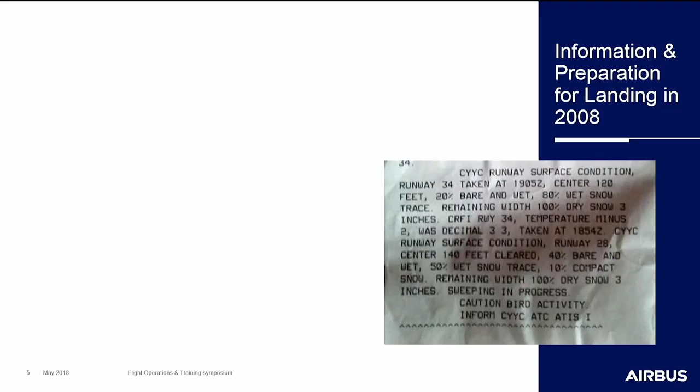And this report gives a lot of information. So in this case, we only have a part of the runway that is cleared. It is 40% bare and wet. It is 50% wet snow trace, and it's 10% compact snow. And we have the edges that are covered with dry snow.

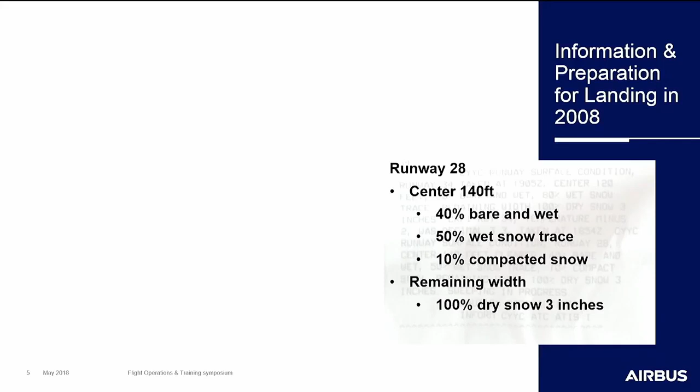A lot of information for our 2008 flight crew that's trying to now enter this type of table to do their computation. And this was obviously not an easy call. It was not easy to make a relevant assessment.

And on top of that, the distances that we published were not as operational as they are today. That is why we implemented on top of that, even though we had a principle of reporting what the inspector would see, initiatives trying to give information that was directly relevant to performance.

And because we're in Canada, I have to talk about the Canadian Runway Friction Index, the CRFI. CRFI is an interpretation of a measurement made on the runway that results in a number, and this number is intended to be used directly in the determination of performance, at least for landing.

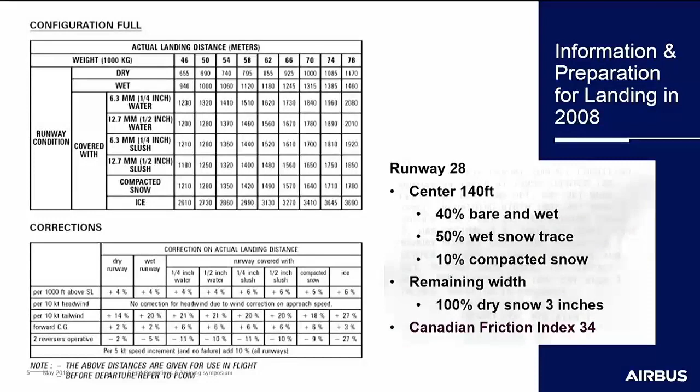However, this looks at only a single criterion, and what we have understood with the TALPA is that we need to have a holistic approach and look at all of the elements. So TALPA addressed this holistic approach by coming up with the runway condition assessment matrix. It's pretty small, and I'm sure you can't read it, but you don't have to. You all have it in your books, and I'm sure you're very familiar with it now.

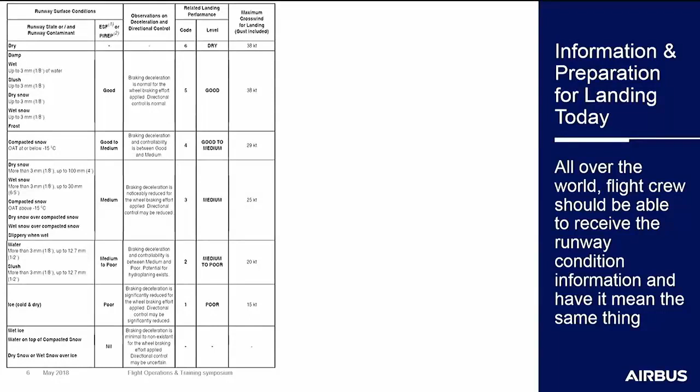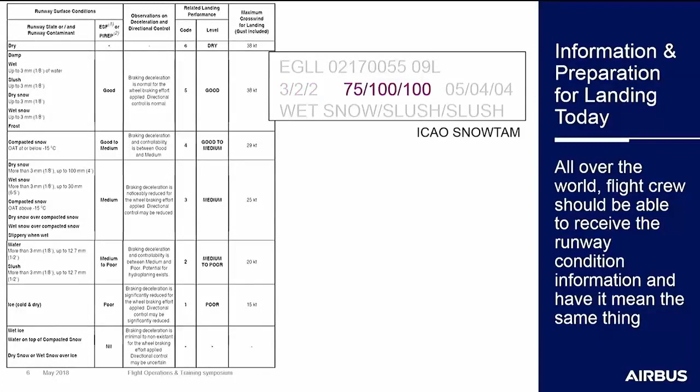This allows us to directly interpret the new type of report that we're going to get from winter 2020-2021. So here I've put together an example for Heathrow, where we have the information such as the runway condition code, the percent of coverage, the depth of the contaminant in each runway third, and the predominant type of contaminant in each one of those thirds.

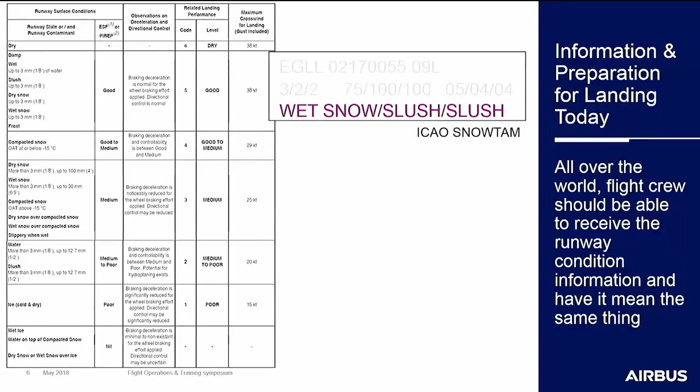So as I said, the FAA has implemented this already since 2016, and here you have an actual report from Binghamton from this winter, end of this winter, where we have the same elements: runway condition code, contaminant type and depth, provided to the flight crew.

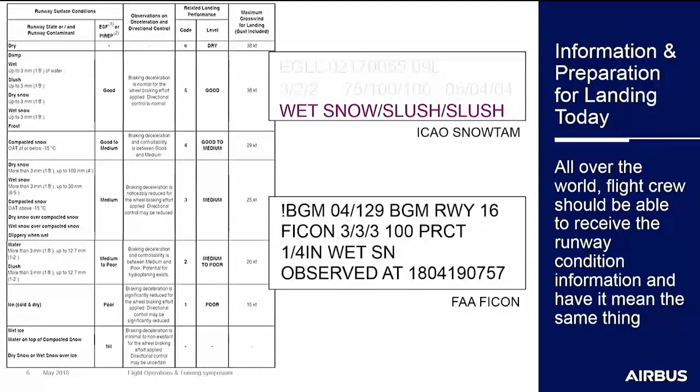What do you do with such a report? Well, you can directly use the runway condition code in your FlySmart application, select the appropriate type of contaminant, in this case 2 for medium to poor, and you obtain your performance calculation.

What if the inspector in Heathrow now thinks that the runway is acting worse than the slush, which is nominally in category 2? He can report a 1, and similarly the pilot can adjust his performance to that poor braking action immediately, directly in the application.

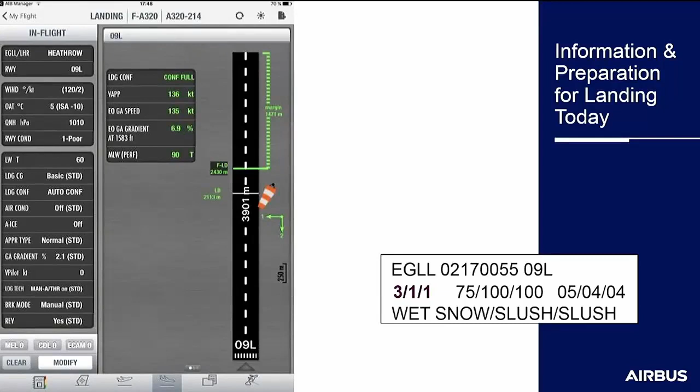So much easier to do, and for landing, we think that we've got pretty much all bases covered. We are able to make use of any information that is being given.

For takeoff, the situation is still not quite as perfect. We have, in Europe at least, a regulation that clearly says we need to calculate with contaminant types and depths, because for those contaminants where drag is involved, we have to take that into account for the acceleration and deceleration phase. Depending on the conditions, either one of these two could prevail in determining the takeoff weight limitation.

So we can only use one of the columns of the runway condition matrix for takeoff. We can rapidly and easily find real reports. This one is a report from McGrath in Alaska. It's not really a runway we'd typically go to with our aircraft, but it's an example of the type of report you can see.

We have a temperature above minus 15 degrees. We have compact snow, 100% coverage. That should be in category medium, so we should have a calculation with runway condition code 3. The report is with a runway condition code of 2.

We've seen for landing that's easy, we just select the 2, but what do we do for takeoff where we don't enter with a runway condition code?

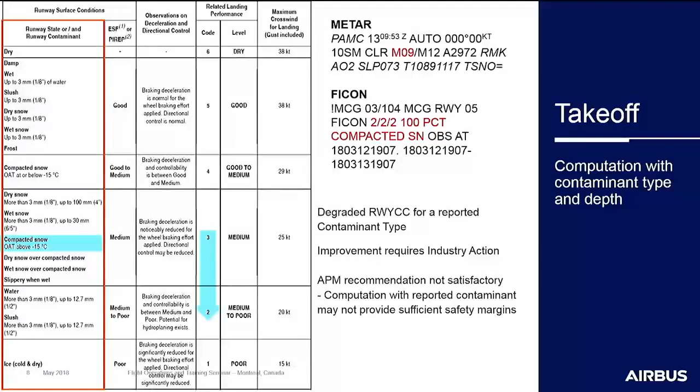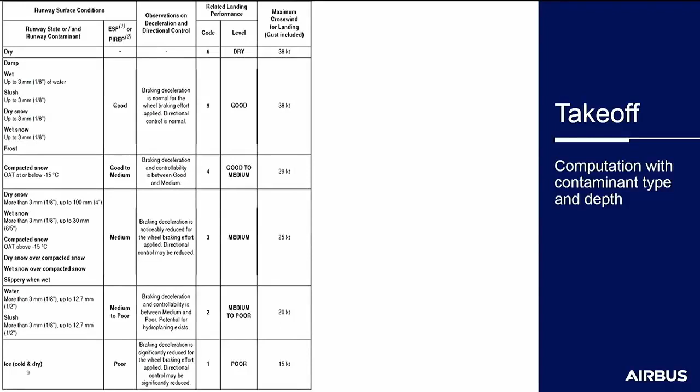Another aspect is that even when the reported contaminant is in line with the runway condition code, we have a list of contaminants in this matrix that is not necessarily available in your software or performance tables.

This is because the prior performance certification requirements did not include, for example, dry and wet snow performance, and we did not have any performance models for that. This is all calculated performance, nothing is demonstrated as such, so without a performance model we cannot generate performance, and there's a gap in trying to address all of the situations.

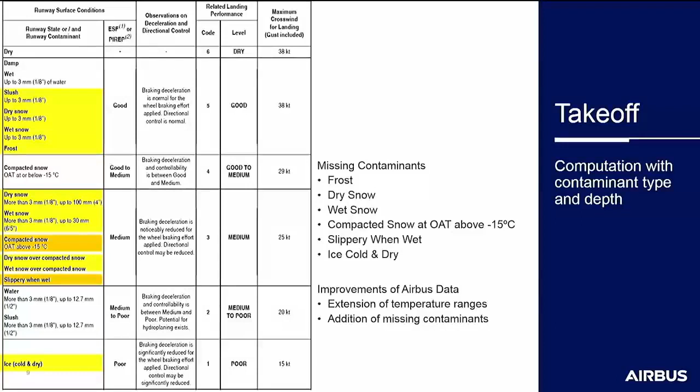Again, we are making improvements. We are extending the temperature ranges for the computations, and adding the missing contaminants for which models have now become available. But we still have a couple of contaminants, like compact snow at higher temperatures, and slippery when wet, for which there is no standard in the industry.

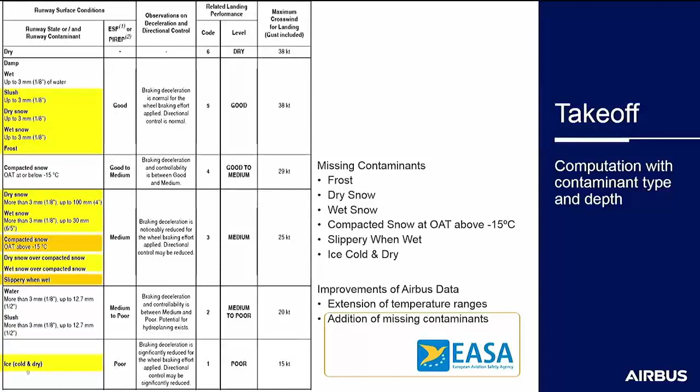This is being addressed again in the EASA rulemaking task, so we should have an opinion issued by the end of the year on that.

Another issue that came up this winter, one that stood out in terms of customer questions, was that of layered contaminants. We have a lot of reports, especially from one particular airport, Oslo in Norway, where they were frequently reporting layered contaminants.

So 4.7 stands for dry snow on ice. If you want to find this contaminant in the runway condition assessment matrix, you have to move down further than the area for which we actually provide performance. It's down here in the less than poor or nil category, meaning no performance information is provided, and in principle no operation should occur.

However, these are actually pretty good runways, and they are reported with braking action 3 for landing. In fact, they look like that.

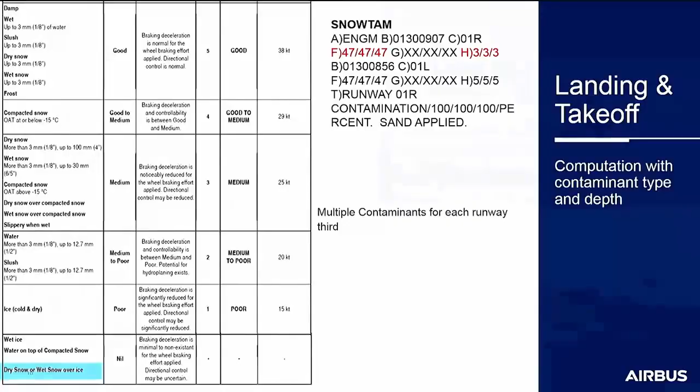So there's ice on the runway, but it's not what the tire is in contact with. The tire is in contact with a relatively clean runway that is covered in a light dusting of snow. So far, we have not come to a final conclusion on how to address this, but a workable solution has been used by several operators last winter by applying dry snow performance, and this was appropriate because

it allowed them to operate and at the same time make a realistic assessment. On the top end of the scale of winter runways, we find specially prepared winter runways. We have some operations in Northern Europe where operations are based on the necessity of having at least a runway condition code 4 in order to carry the desired payload year-round. So they have conditions of large minus Celsius degrees for several months, during which it is difficult to remove the contaminant entirely because

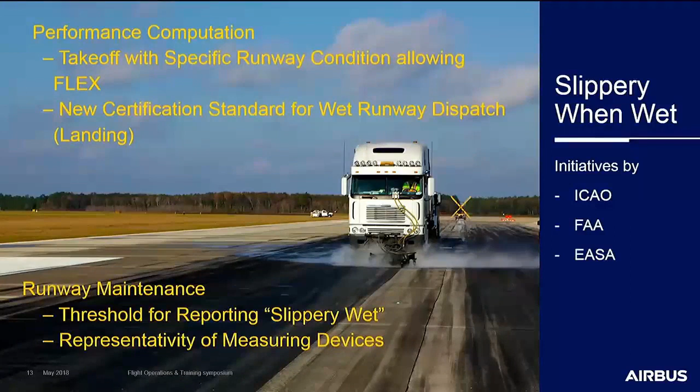In order to address this situation, where we don't fully understand why friction on wet runways can drop off very suddenly, we have put into place a procedure that you are hopefully familiar with in the FCOM. It asks you, when evaluating performance on a wet runway, to make a cross-check to identify whether you can operate without using reverse thrust or not. This cross-check is made with an in-flight landing distance computation using medium to poor braking action without the reverser. And if you can achieve a stop on this runway, then you're allowed to plan this operation without reversal.

The reason behind that is that during the accidents that have occurred, there was typically heavy rain, and this was involved in this sudden drop-off of friction, but there is also some characteristic of the runway involved that we may not necessarily know about. This procedure should really be applied whenever heavy rain prevails at the destination.

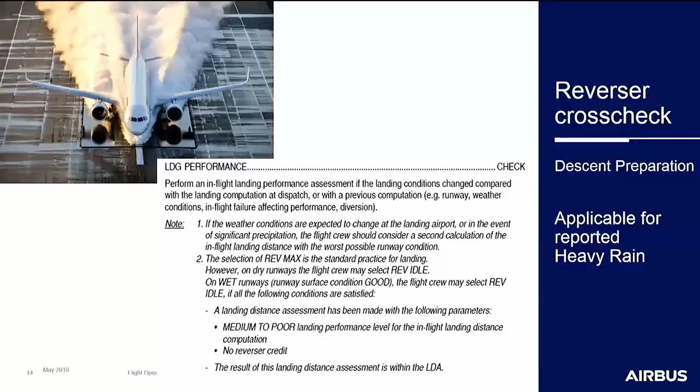So we have now seen how far we've come. We've also seen that a few things are still left to be done, and that even though we have better performance assessment, the environment can still surprise you. And to address this startle factor that we have seen with Florence on Tuesday, we now have a system available, the runway overrun prevention system, about which I would like to speak a little bit.

So the ROPS is a system that I'm sure you have now heard about, because we have been talking about it in a lot of conferences. It makes an assessment of the energy of the aircraft during the approach in order to decide whether you will be able to make a safe stop.

It is divided into two phases. The first phase is the airborne phase, up to a transition on the ground, where the system is go-around minded, and it will give you alerts like if wet, runway too short, or runway too short. Then there is the ground part, during which the system is stop-minded, where it will give you indications on how to maximize your deceleration.

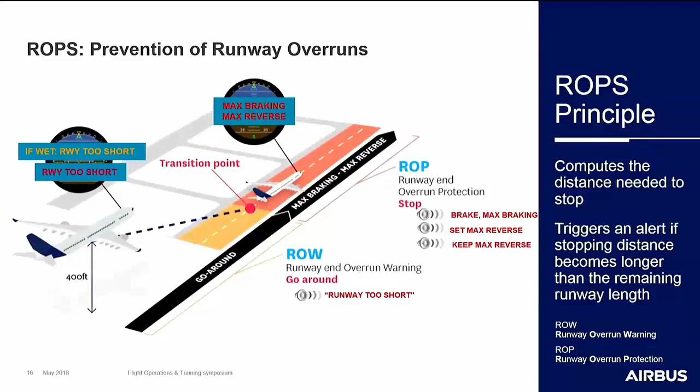This system is now installed on many Airbus aircraft, and we have already got 1.72 million landings with this system. It is installed on over 1,000 aircraft by 68 airlines. So we now have a very significant exposure of the system in service, and it's generally working well.

But like any system, there were some teething issues which I would just like to quickly talk about. And the message I would like you to take away from this is that all of the known issues have been fixed. So what sort of thing have we seen?

We've seen the loss of ROPS. There are two reasons for this. One is that the aerodrome or the runway data may not be in your database, in which case the system cannot make a prediction, or that there is an issue with the GPS vertical position, so the positioning of the system for the energy determination becomes unreliable and the system becomes lost. So both of these can be addressed. For the aerodrome data, NavBlue can assist you in dealing with the providers in order to update the databases on your network. And for the GPS vertical position, a fix is available.

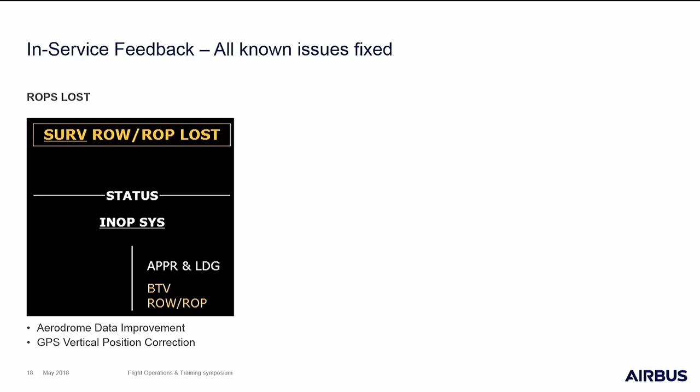The nuisance alerts that we have seen in service are divided into two categories. One is the low-speed alerts. Most of these were associated with a runway that had a shallow turn at the end onto the taxiway, which operators or flight crew were approaching at relatively high speed. The system does not know about this taxiway, so all it tries to do is stop you before the declared end of the runway, which it considers like a brick wall. So it would generate alerts of max braking and max reverse at the end of the landing roll, when the flight crew was in total control of the situation. This has been addressed by changing the conservatism of the runway end protection and adjusting the thresholds for the warning, and so they now have largely disappeared.

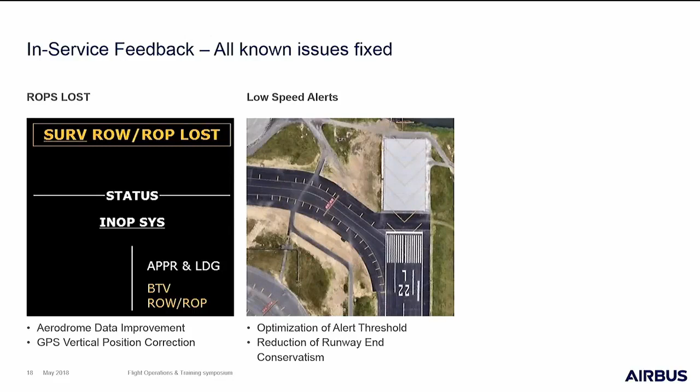The other category is the high-speed alerts. We have typically seen these on long runways that were dry, and obviously there was no issue with the ability to stop the aircraft on the runway. This was again due to some very conservative thresholds on the alerts, and those have been addressed.

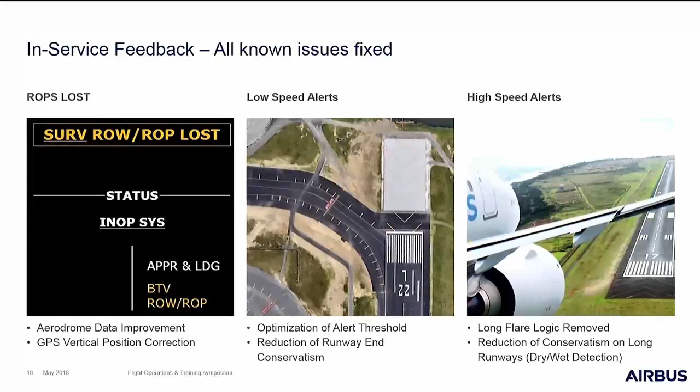So all of these fixes are available, and if you want to retrofit your aircraft to these standards, I would invite you to talk to NavBlue to find out what these standards are.

But besides fixing it, we are also making it better. One step is on the A350, the coverage of contaminated runway conditions. As you have seen in the first slide on the ROPS, it currently on the A320 and A330 only addresses dry and wet runway conditions. On the A350, we have a runway condition selector, which allows selection of the runway condition code or the runway contaminant type on the ECAM, and then a protection that is adjusted to this runway state. On top of that, during flight preparation, the system will show you which runway states do not allow a safe stop under the forecast conditions.

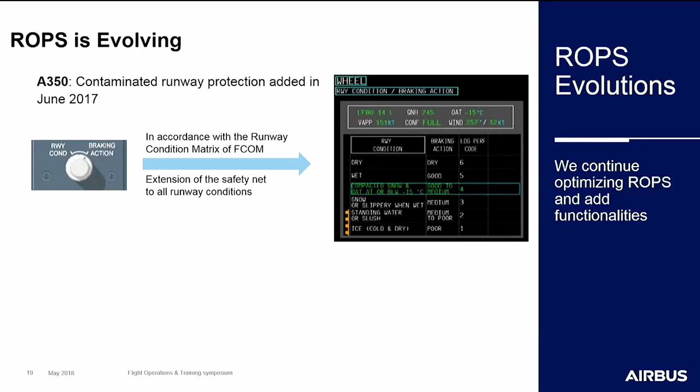On the A320, A330, we are moving to improve the system by also introducing a runway condition selector. In a first step, it will only allow a selection between dry and wet, but this is already a step forward because it removes a conditional alert that we currently have, which is 'if wet, runway too short,' meaning we have relatively complex flight crew procedures associated with this alert. An alert should be clear and only allow one interpretation, and that will be possible with this change.

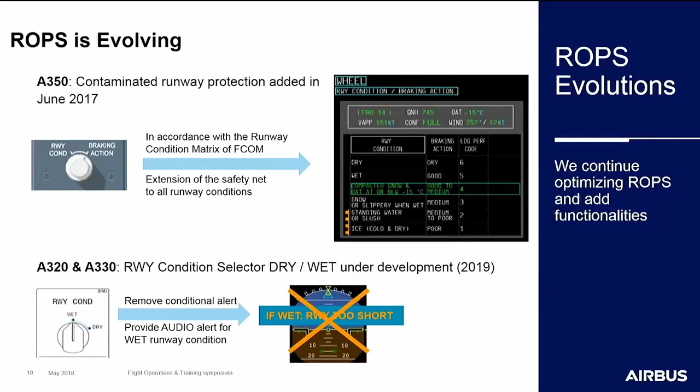So we have now seen how we are trying to better understand what the runway is really like before we're doing the operation. We also have seen how we're addressing the surprise element when the runway behaves differently from what has been reported. Now, to close the loop, I would like to invite Logan to present Runway Sense.

All right, thank you, everybody. I'm already getting the sign that we're going to have to speed this up a little bit. But I'm very excited to be here today.

My name is Logan Jones. I work within NavBlue, and I think what I'm going to show you today shows the power of the collaboration we can have between Airbus and NavBlue. This is a project I've been working on for about 8 years. 8 years is a long time. 8 years ago I couldn't grow a beard, and now look at me.

Lars presented what we've been doing on runway safety, but there was one key element we felt was missing. You're using the information to prepare your descent with FlySmart, you're using that information with ROPS, but what if the information itself that you received was not correct? What if it was out of date?

So when we looked at one of the key things we needed to do to close the gap on runway safety, it came down to the runway condition information.

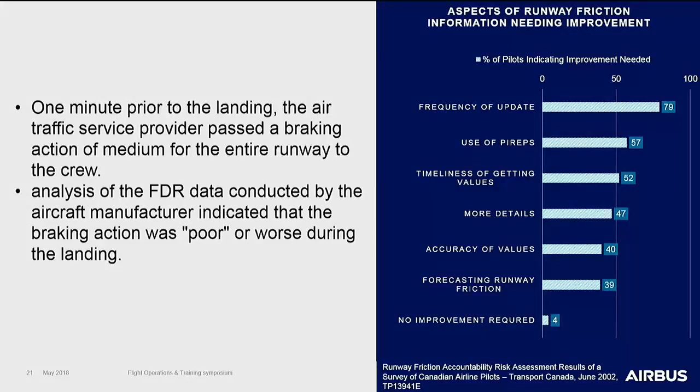In the second case, friction coefficients on the runway were measured immediately after snow removal. The braking action in the SNOWTAM announced at 22:07 that it was good across the runway. Twenty minutes later, based on QAR data of the accident, the runway conditions were such that the braking action was between medium and poor. In all these cases, the flight crew had done the right things.

They had prepared their approach, but they didn't have the right information. So we've been working on how to solve this issue. After 8 years of research and technology, we started to ask: how can we build a more connected aircraft? How can we share the information? And why can't the aircraft itself measure the friction and report it to the whole airspace community?

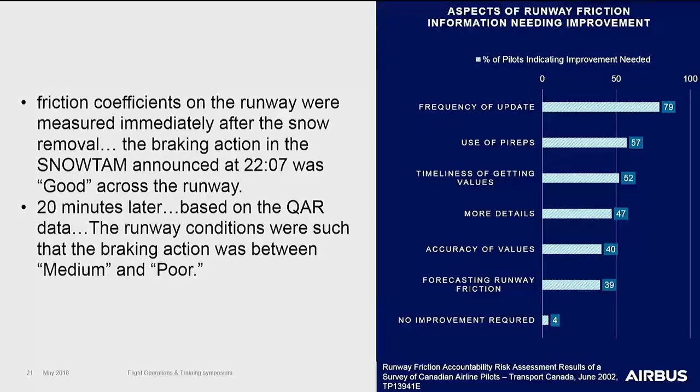So this is what we've developed.

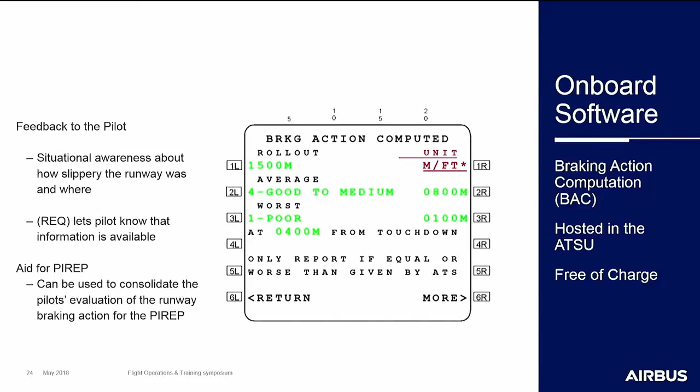And we can GPS locate exactly where these braking actions were happening on the runway. So with every landing coming in and reporting, the airport themselves are getting a real-time view of: okay, the runway started out good, we just cleaned it, 10 minutes later it's snowing, it's degrading down to good to medium, it's degrading down to medium. And the airport now has that information to make that strategic decision.

Okay, let's talk to ATC. ATC, in 15 minutes, we're going to have to close this runway. We see that it's trending downwards. So this is a benefit to everybody. This is not just the airlines. This is the airports, the ATC. Having information at their fingertips of what's happening right now on the runway was something that never existed before.

If an airport wanted to know what was happening on the runway, they had to say, okay, close the runway, let's send out the friction tester, let's send out somebody to measure it. Now the runway is closed for 25, 30 minutes. Now they have the information at their fingertips.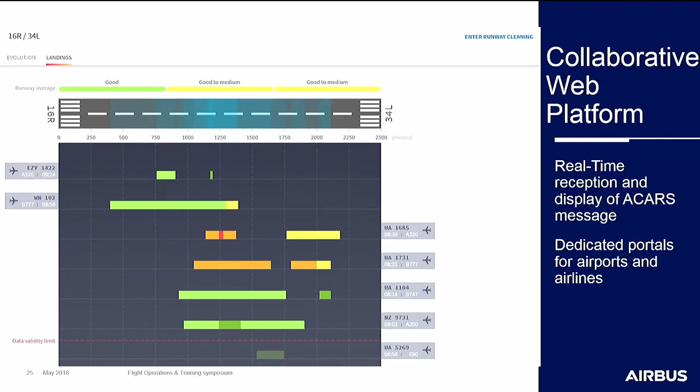So where are we today? There's a software and a collaborative web platform. On top, the software: after 3 years of in-flight testing with several partner airlines, we are certifying the software this month, so it should be ready this month. After that, we're going through a controlled entry into service with partner airlines. This is still open. If this is something that can bring a real benefit to your operations, if you experience contaminated runways, contact us to be part of this controlled entry into service. It's going to last between 6 to 8 months. At the end of that, early next year, the service bulletin will be available, again free of charge, in the Airbus catalog.

On the collaborative web platform side, as you saw, we already have the working prototype ready. The system will be built out in June, and then again we also need to partner with the airports. They need to see how this information can be of use for them, how they can use this to benefit their operations. So we'll be conducting trials with partner airports over the next year to show them the value that this sort of new information can bring to their operations.

So that's it. I think what we've shown here today is that we've been working now for 10 years on this runway safety topic. Lars talked about all the work that has been done in TALPA, about using FlySmart with a runway condition code to really prepare your descent. We've developed ROPS that can take into account any last-minute changes. And now with Runway Sense, we close that loop to make sure that everybody has the right information about what's happening on the runway. Thank you very much.